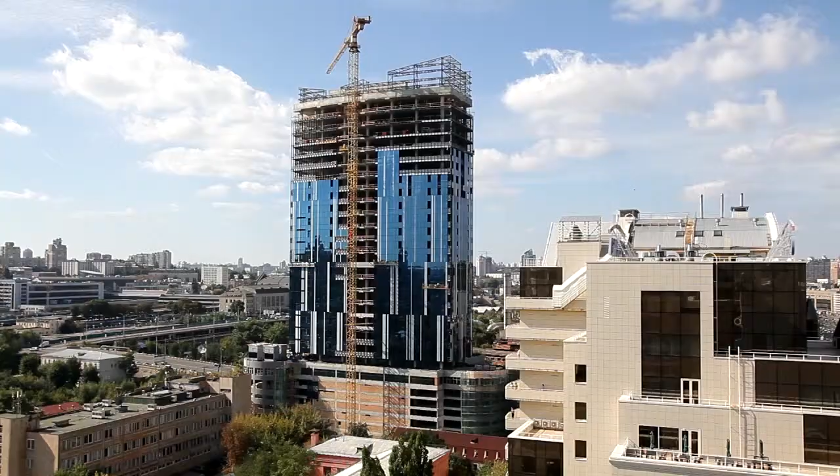Ukraine is a young European country with well-developed industry and steady economic growth. This results in a great number of cars on Ukrainian roads. Battery, one of the most important automobile parts, is the energy source for all automotive electronics. Without a battery, the onboard computer wouldn't work, the radio wouldn't turn on, the lights wouldn't flash. The engine wouldn't come to life without a battery.

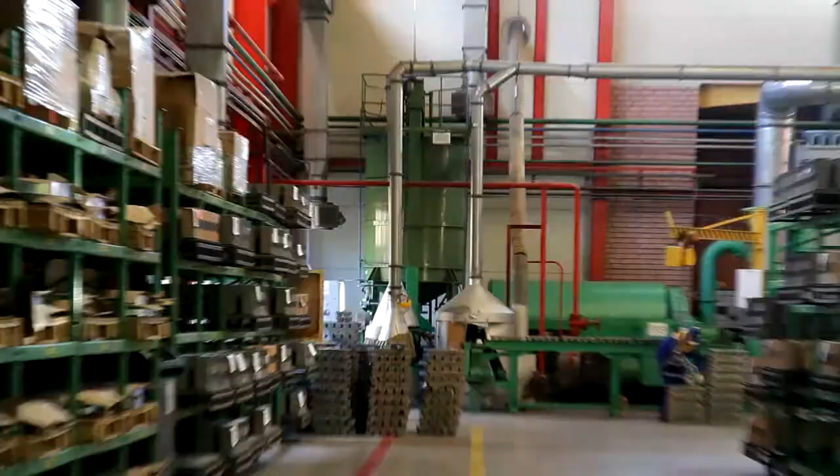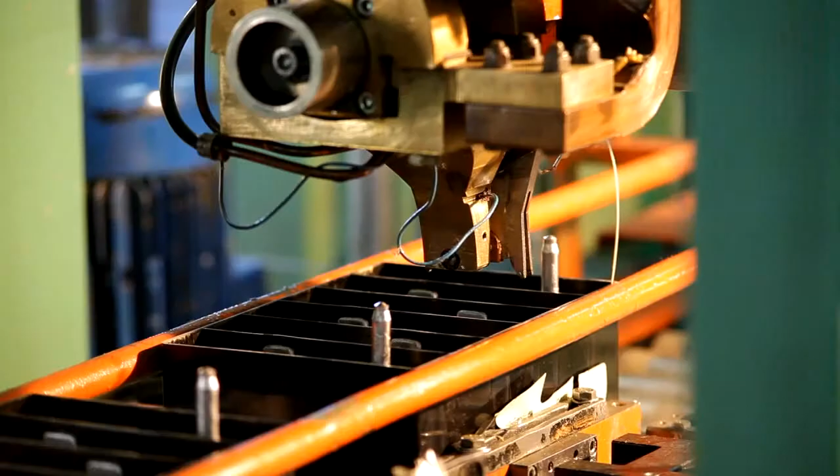National Accumulator Corporation ISTA is one of the top manufacturers of starter batteries in Europe. It was the first Ukrainian company which implemented a full batteries production cycle. High quality of production and the employees' professionalism led the company to gain popularity in both primary and secondary battery markets.

National Accumulator Corporation ISTA.

The history of the corporation began in 1992, when the Ukrainian government decided to create an open joint stock company, ISTA, and to build the first lead-acid batteries factory in Ukraine.

In 1995, the first stage of the ISTA Center factory was launched. In 1999, the marketing and sales company Trade House ISTA was created.

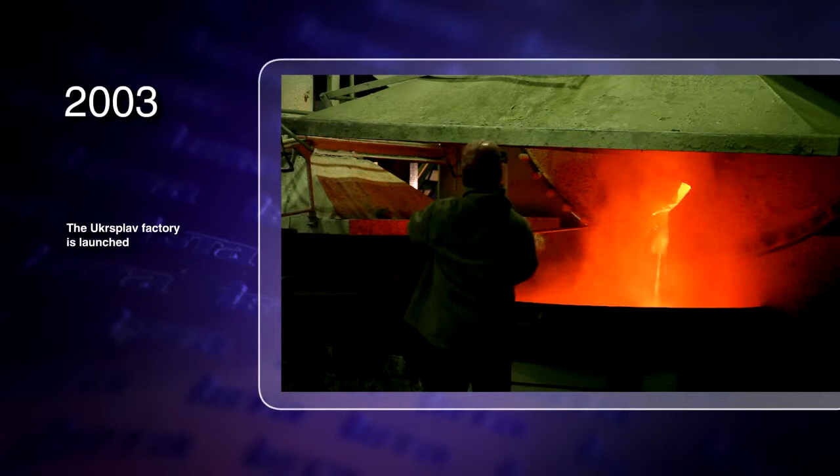The production capacity is also expanding. The second batteries factory, DOS Energo Automatika, was launched in 2001, and in 2003, Ukrsplav, a factory for regeneration of lead-containing materials. In 2006, Interplast was launched, a factory that specializes in polypropylene cases production.

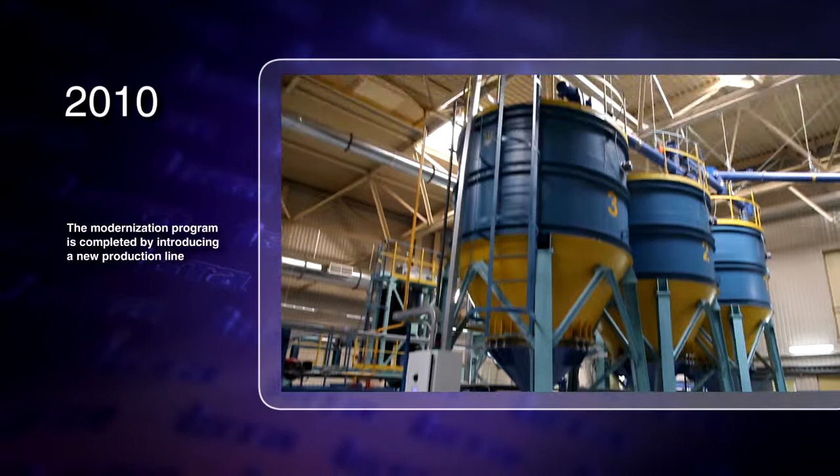In 2007, the corporation began to supply batteries to Renault Group, one of the top automobile manufacturers. In 2008, the international certificate ISO/TS 16949:2002 was attained. In 2010, the modernization program was completed by introducing a new production line.

Battery supplies for the municipalities of Italy and France were commenced. In 2011, supplies to European agriculture machinery manufacturers began. ISTA Corporation became the only Ukrainian accumulator battery manufacturer to receive international certificates in ecological production and quality management.

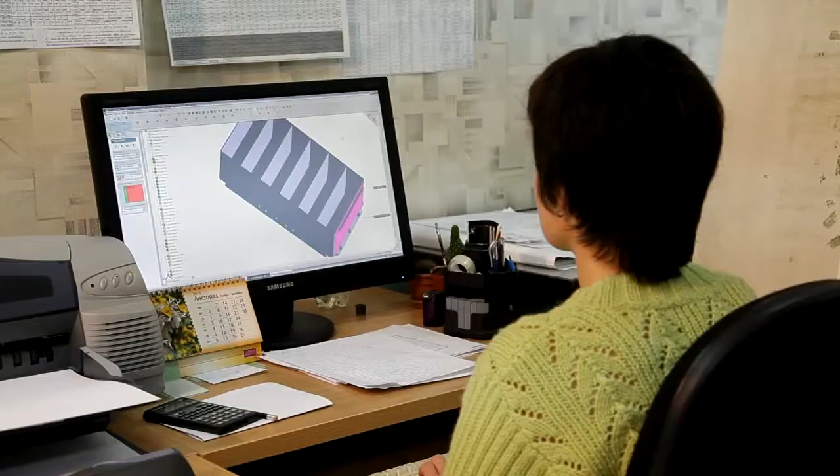Today, ISTA Corporation comprises two factories for car battery production, ISTA Center and DOS Energo Automatika, a plastic parts manufacturer, Interplast, the Ukrsplav factory, and the marketing and sales division, Trade House ISTA. The corporation also has its own research center and R&D bureau.

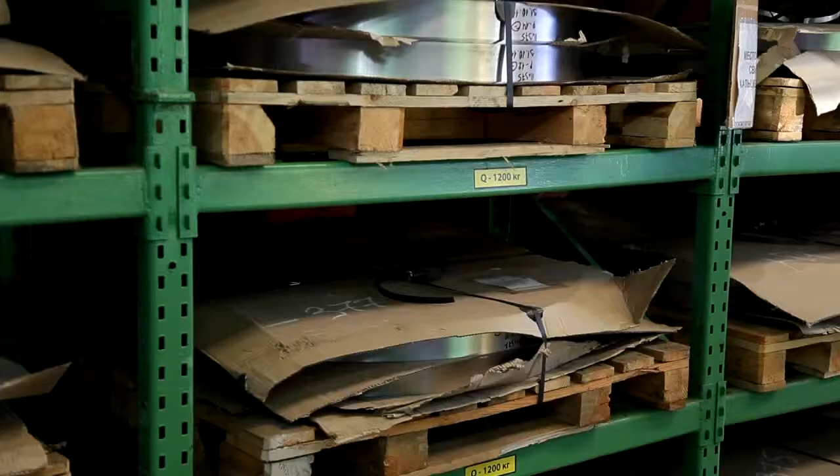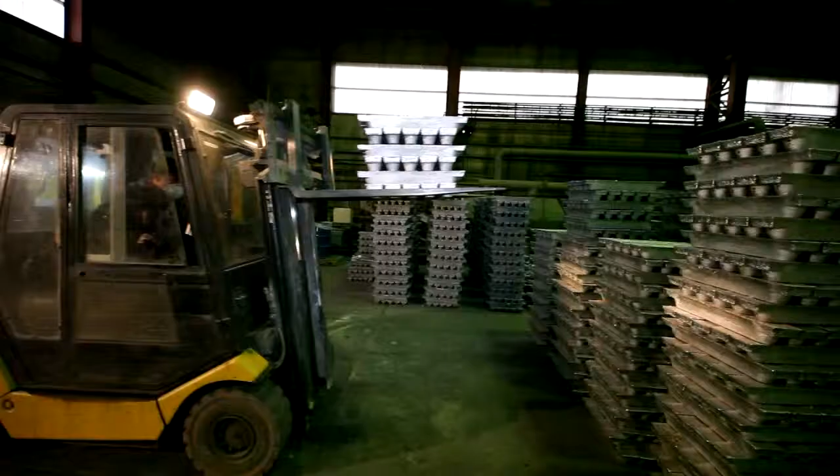This organizational structure ensures a full cycle of battery production, from getting raw materials to delivering finished products. At each stage, strict control of technological processes and quality of products is maintained.

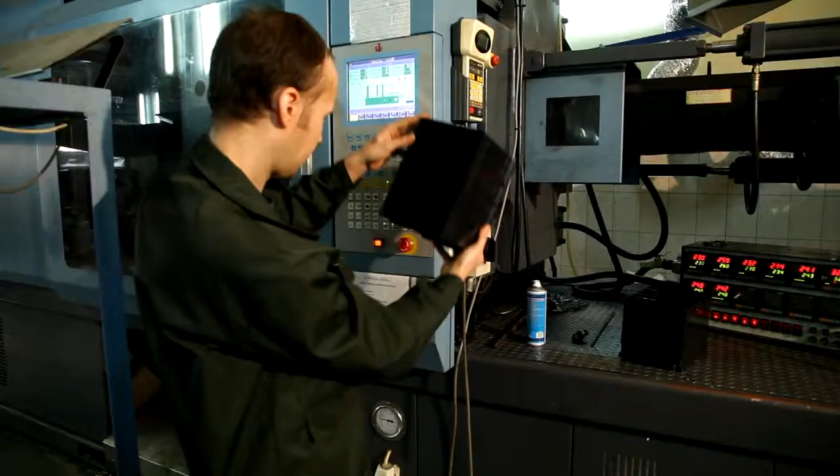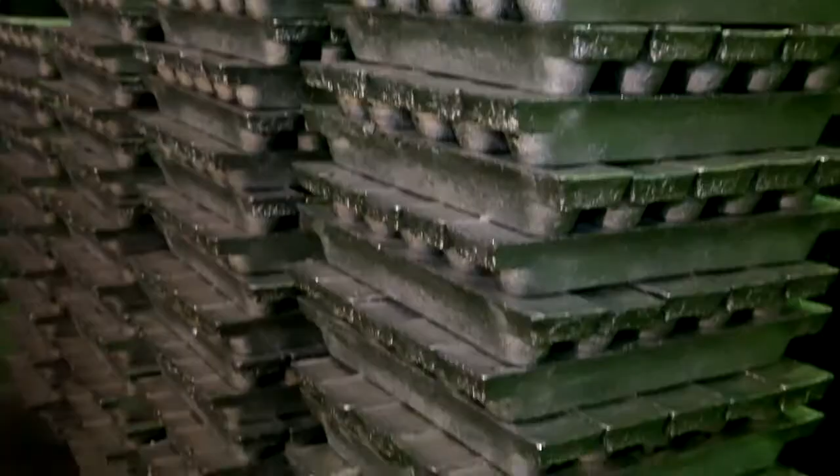The manufacturing process begins at the Ukrsplav factory. Here, leaden alloy is produced, from which the electrode plate, the main component of the battery, is made.

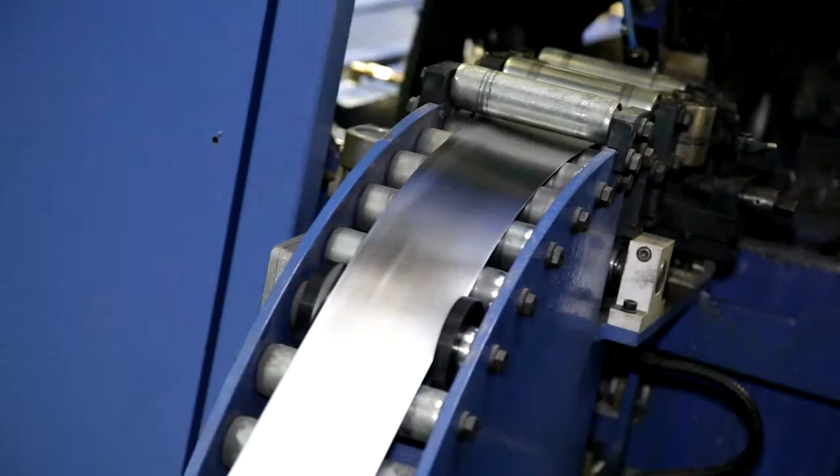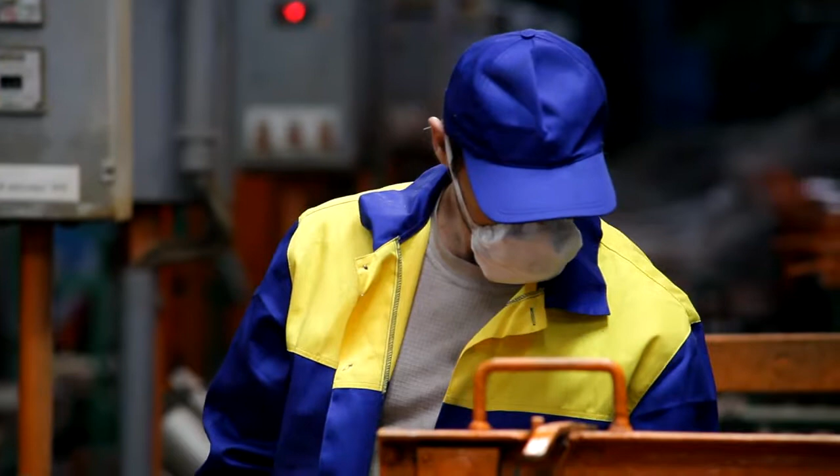The basis of a stretched plate is an electrode grid that is produced at the electrode workshop by rolling tape and its following punching. However, at the foundry, an electrode grid is made by a casting method, which is provided with Wirtz equipment. The cast plate comes without mechanical defects, which prevents the destruction of the battery's insulating layer.

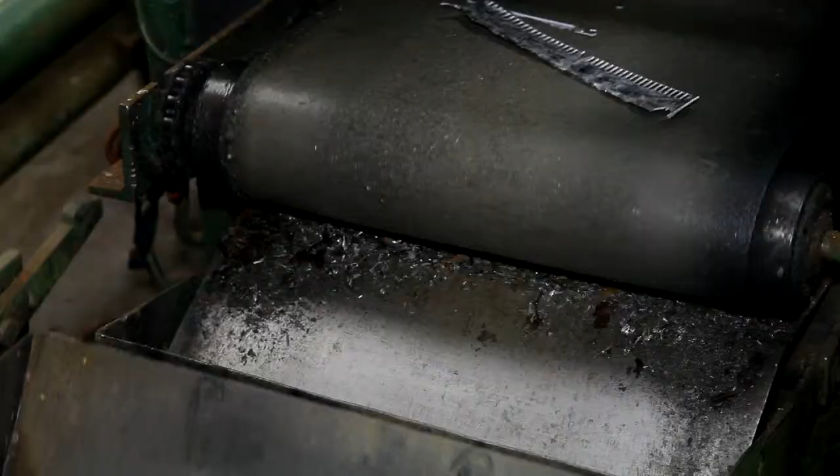Moreover, the casting method is waste-free. All waste materials are returned to the casting boiler.

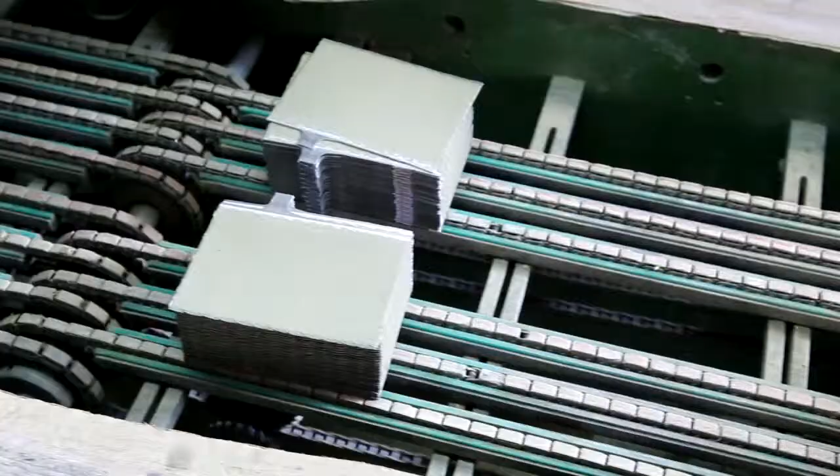Then a specially prepared active mass is applied to the plate. This paste is produced in a modern Eirich vacuum mixer. The vacuuming process ensures more precise temperature conditions and composition specifications.

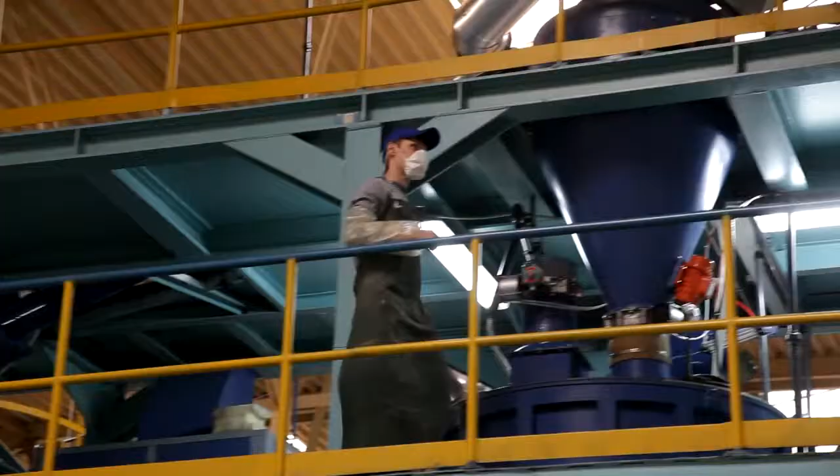A double-side pasting, provided by special automatic equipment, improves the quality of the battery and increases its durability.

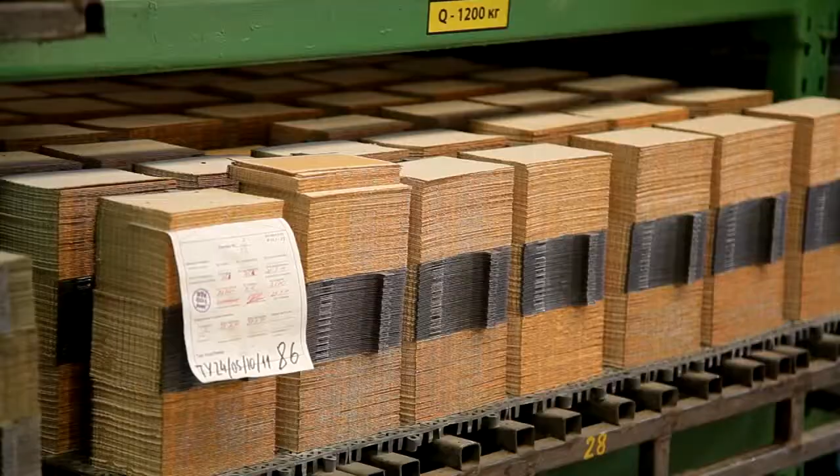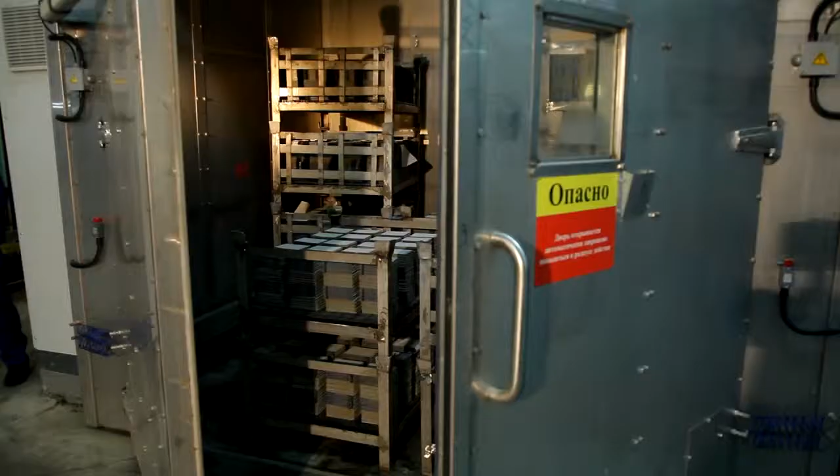Afterwards, the plates are transferred to the curing workshop, equipped with catalytic chambers. These modern curing chambers not only reduce the cycle duration, but also provide precise observance of all required technological standards, which increases the longevity of the battery.

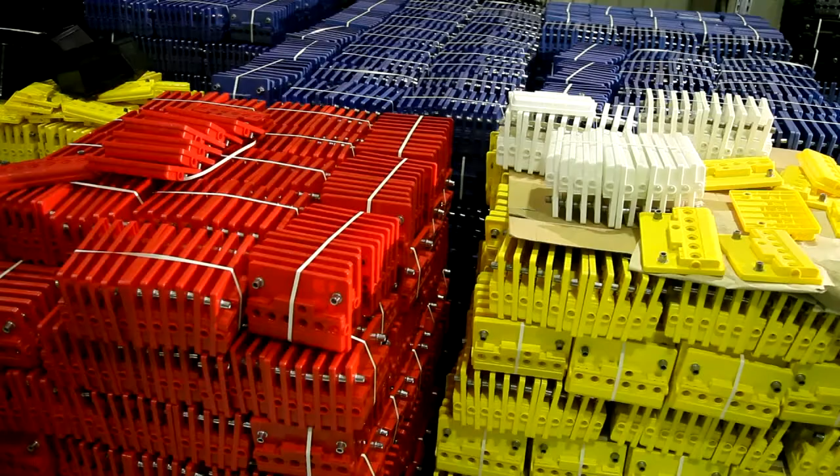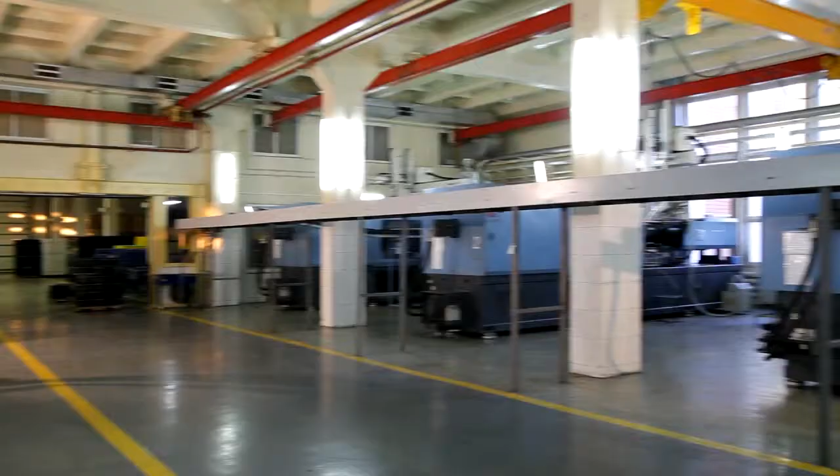In starter battery production, various plastic parts are used. Almost all of them are made at a specialized ISTA Corporation company, the Interplast factory. The factory is equipped with the latest foreign equipment, and most of the production process is fully automated.

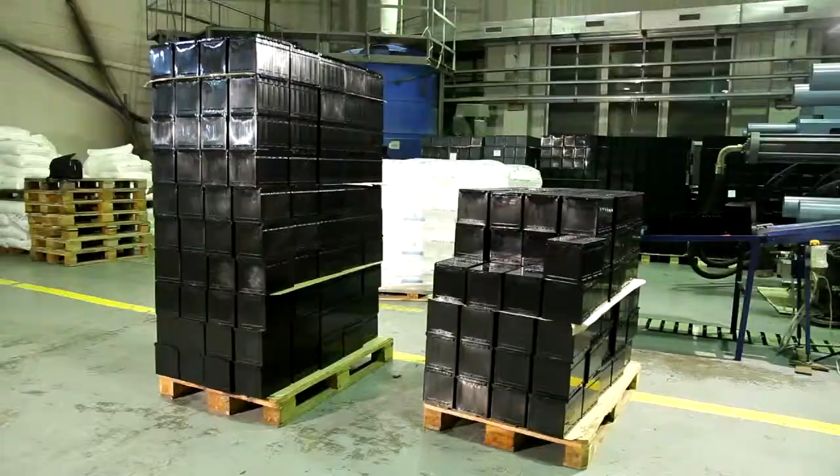A high-quality polypropylene is used as raw material. Use of modern thermoplastic machines allows control not only of the quality of products, but also their appearance.

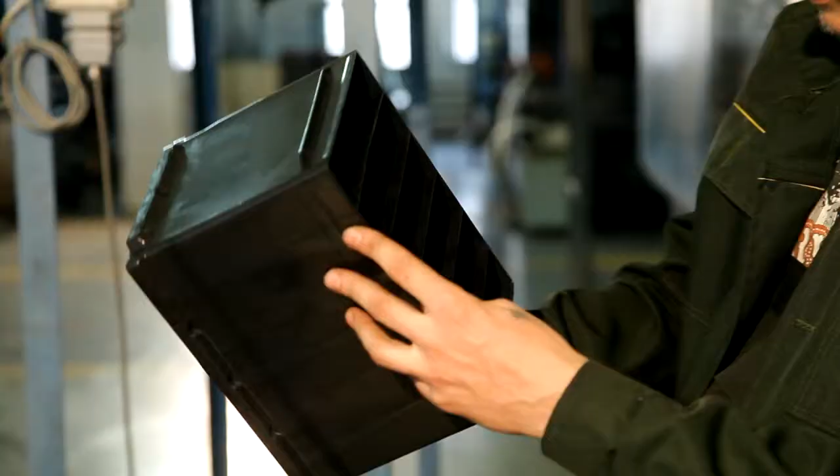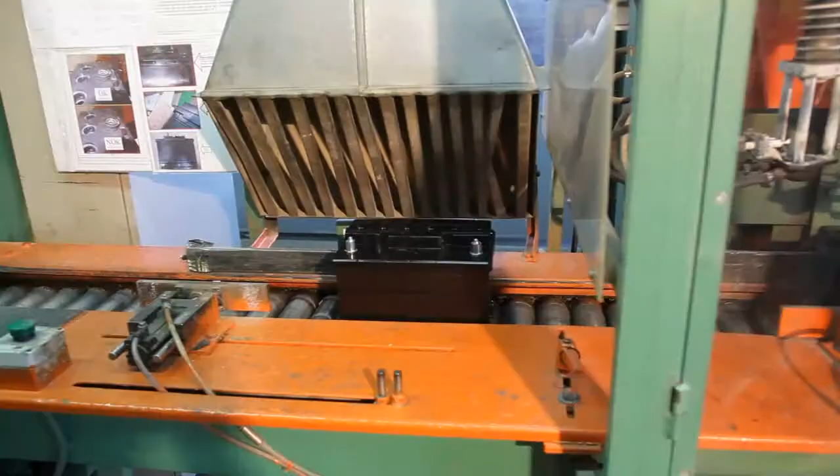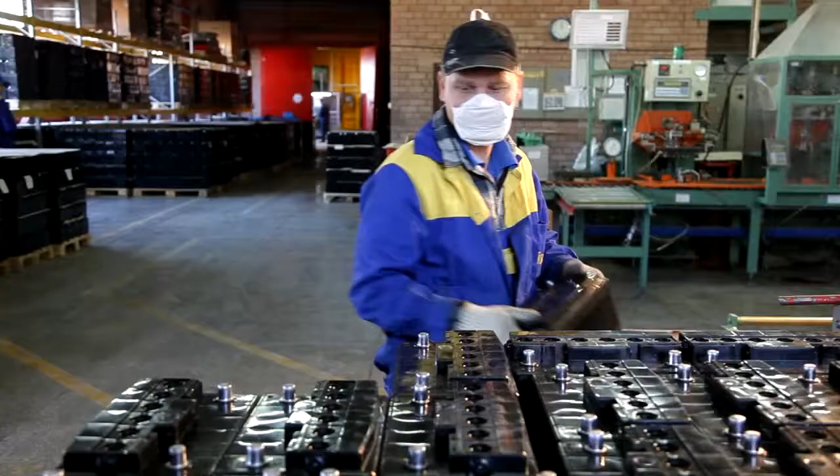The starter batteries are assembled at the assembly shop with Sovema company's equipment. This process is automatic. Automatization allows control of the assembly quality at each stage of the process.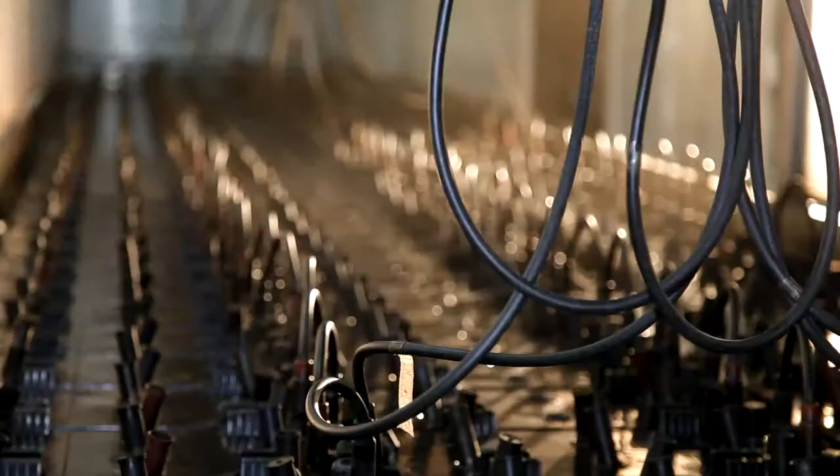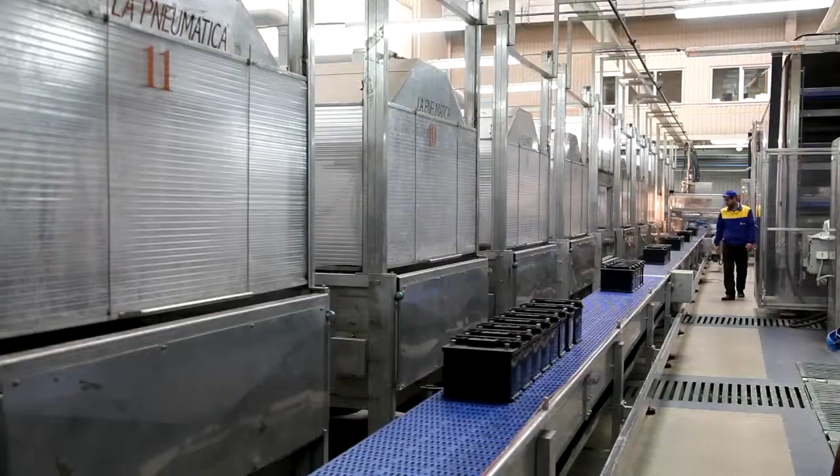Assembled batteries are transferred to the battery forming workshop. The battery forming is carried out on special forming desks with water cooling. Due to the use of modern equipment, it was possible to dramatically reduce the forming time, improve battery quality, and stabilize parameters. This process is controlled by a specialized computer system.

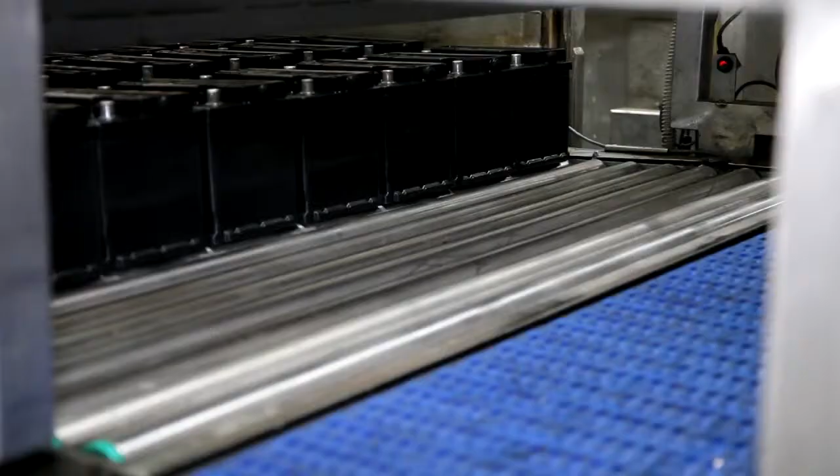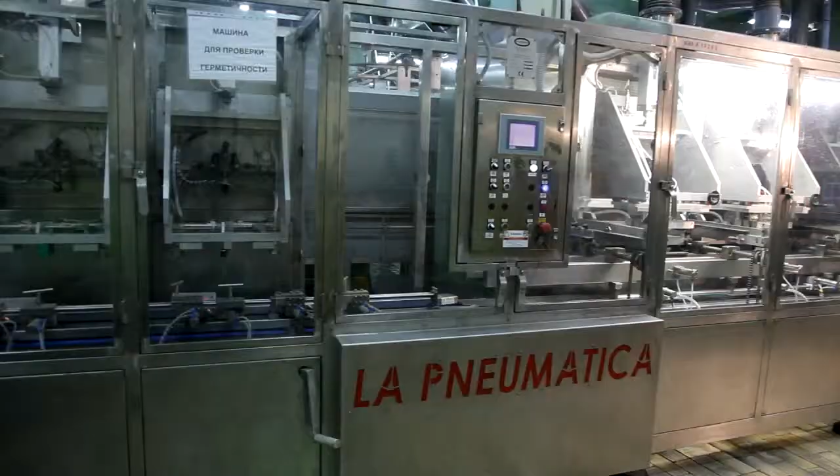After forming, all the batteries arrive to a pre-delivery preparation line, the last point of battery's quality control. This is a fully automated line with La Pneumatica equipment. Even if at the previous stages of production the construction or battery parameters were somehow deviated, it will be identified.

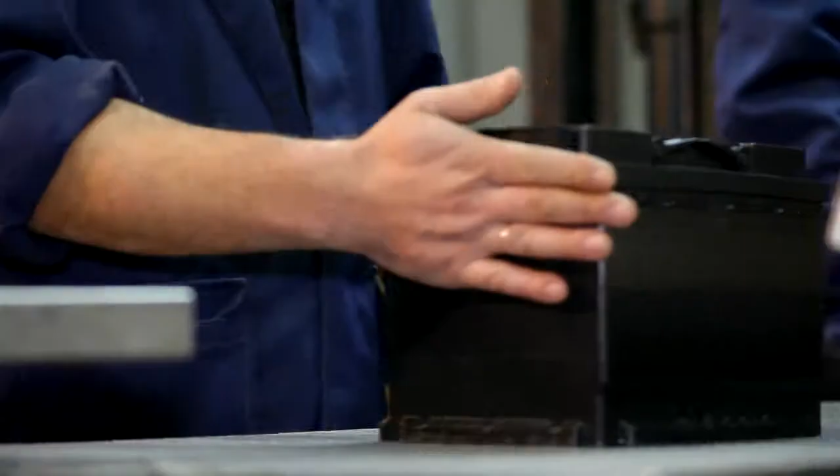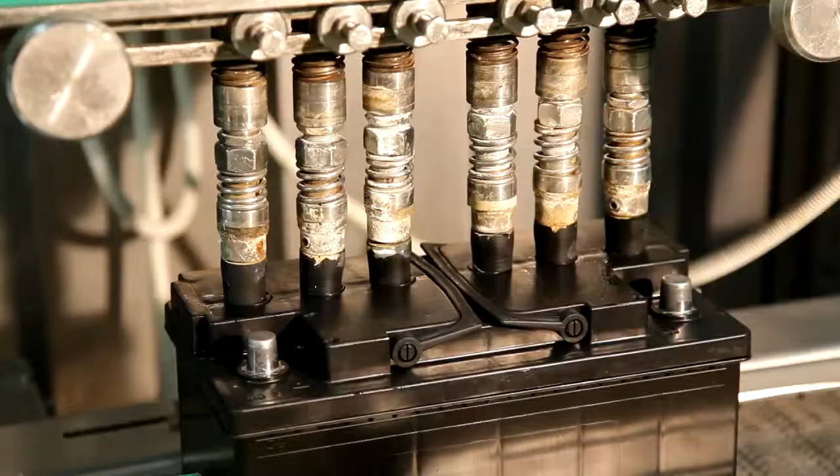Finally, all the products are brought to appropriate marketable condition there. Monitoring and refilling the electrolyte, plug twisting, washing and drying the battery, checking the battery with a high-frequency current and a high voltage are done here.

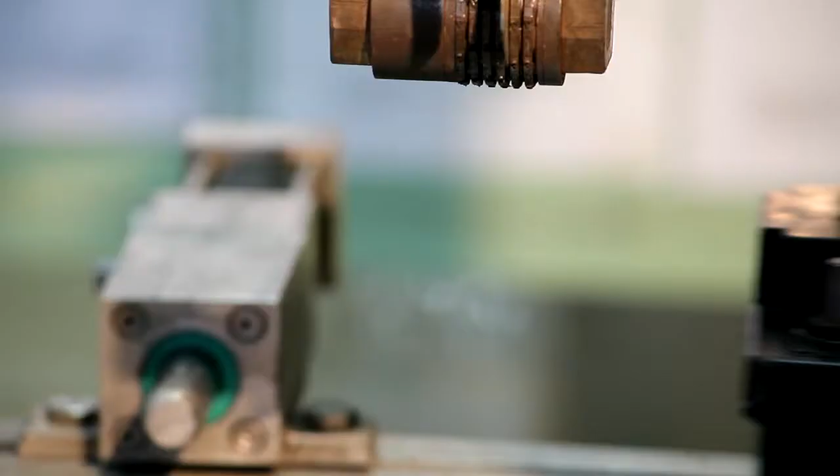After such a strict control, the probability of deviations in the battery tends to zero. At the end of the preparation process, the battery marking and the label sticking are being done. Now, the battery is totally ready to be delivered to the customer.

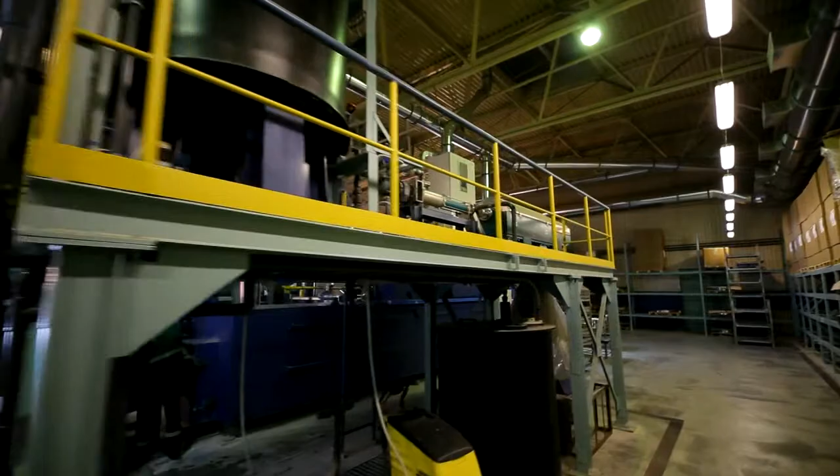ISTA Corporation is a leading manufacturer of starter batteries for cars. Its position as Ukrainian market is stipulated by the high quality of products that meets both Ukrainian and international standards.

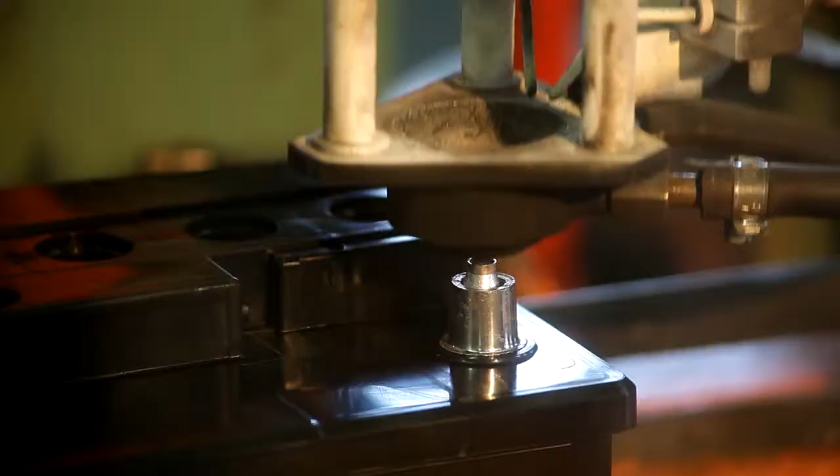Since the quality of the final products is the top company priority, an advanced quality management system certified by the international standard ISO/TS 16949/2009 is implemented.

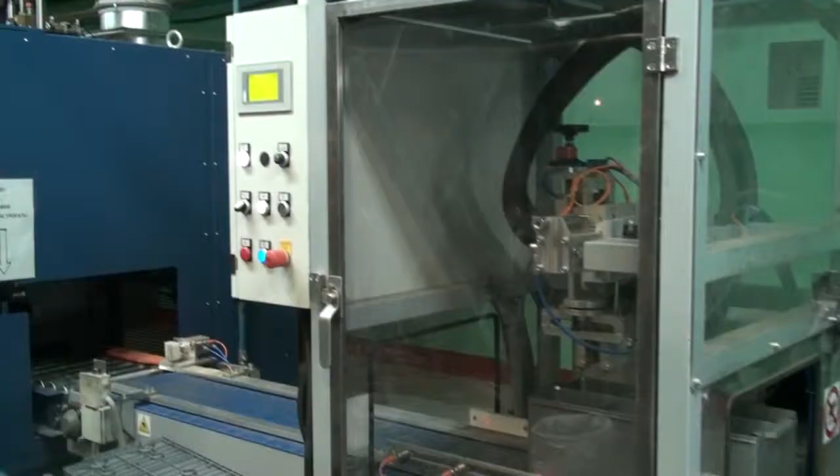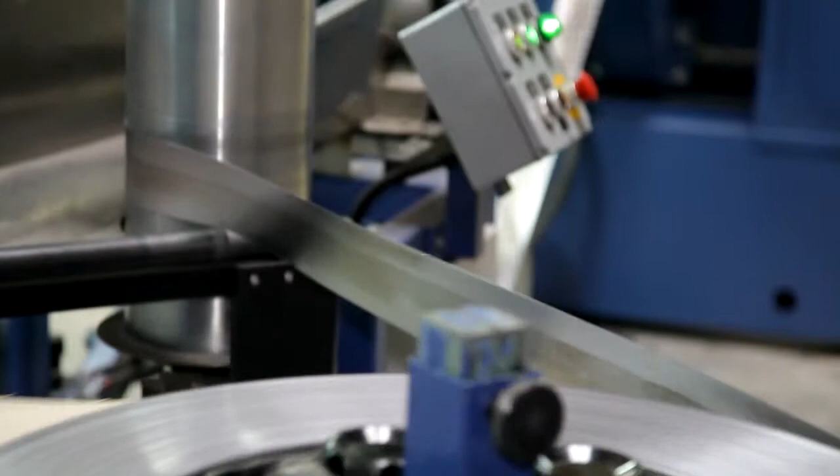According to the requirements, the newest control methods of the main technological parameters of the production process are implemented. To ensure products' constant quality, company plants use the latest foreign equipment. And since most of processes is automated, the probability of deviations from standards and requirements is minimal.

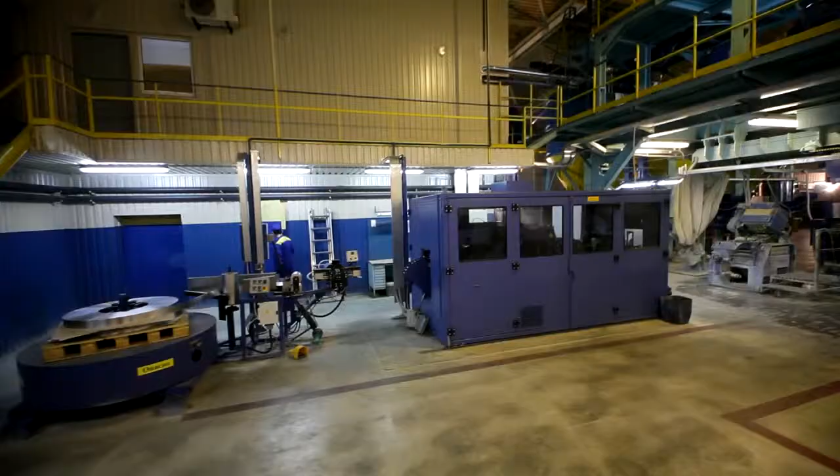In 2011, National Accumulator Corporation ISTA successfully passed the ASES Quality Management System audit for compliance with the Renault-Nissan standards. Successful partnership with this world's leading automobile alliance lasts since 2007.

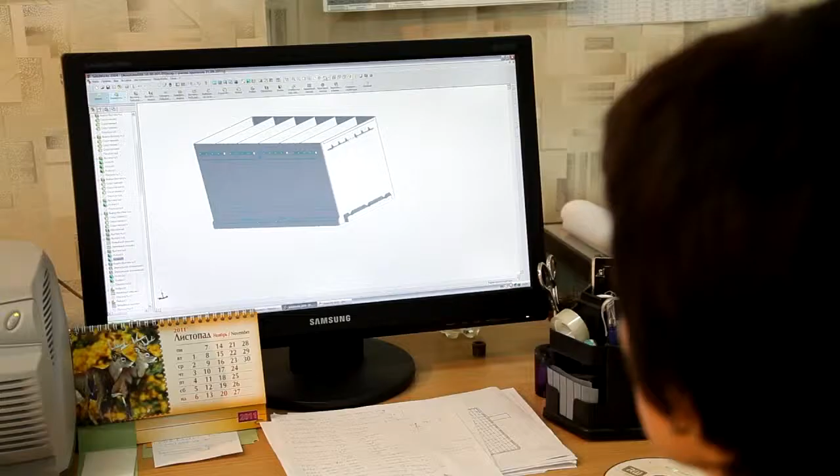A significant contribution to the product's quality improvement is made by their own research and development divisions. The evidence of active and efficient work of these departments is a huge number of patents obtained for different inventions in the batteries production. For instance, here we obtained patents on accumulator batteries for special machinery and maintenance-free batteries.

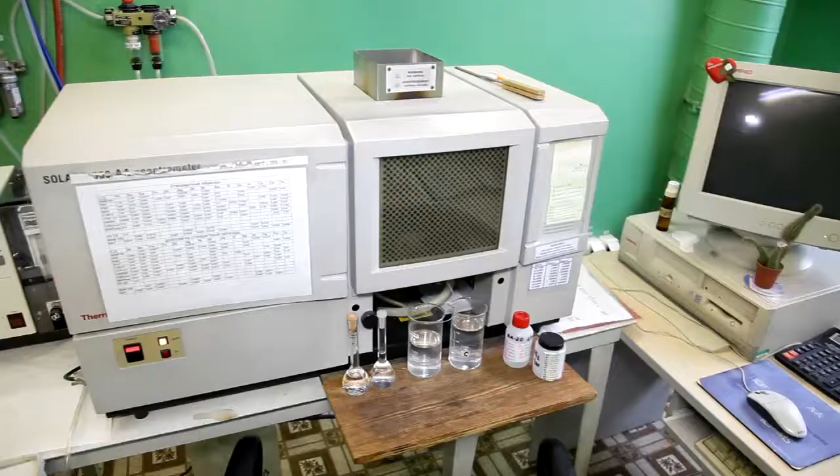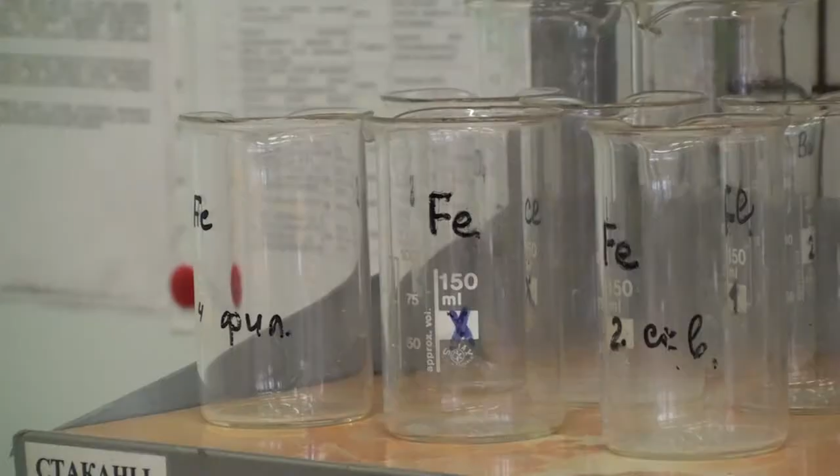The work that is ongoing in the laboratories allows to change the production process according to the specific requirements of automakers. In addition, laboratories conduct research on composition improvement of alloys of lead-containing plates with additional doping, which increases corrosion resistance of the final products, as well as they research the optimization of lead refining modes.

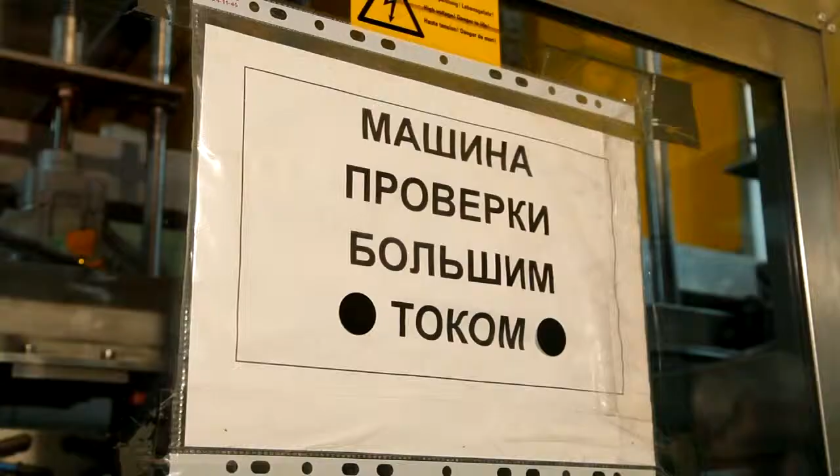The consumer characteristics of ISTA Corporation products comply with the current market requirements. They are a low self-discharge, a resistance to deep discharge, a stable starting power, and improved launch of a cold engine. Not the least of them is a contemporary battery design, which is also crucially important.

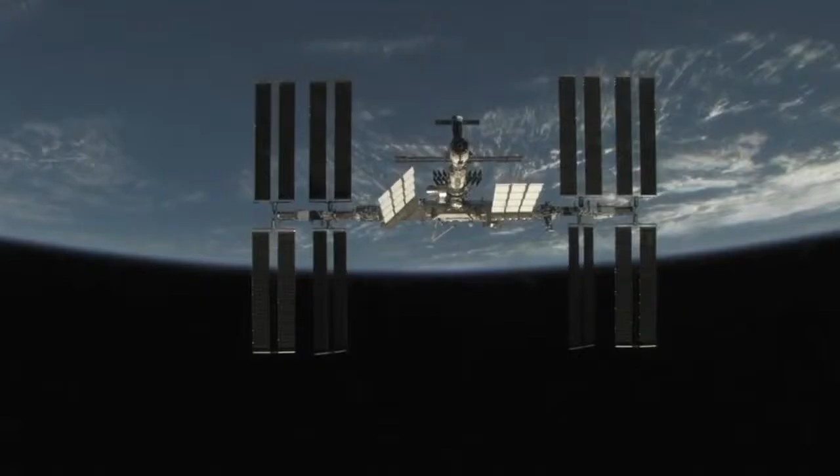Planet Earth is unique. We humans live here. The Earth is our home. However, the more careless exploitation of its natural resources and unrestrained environmental pollution is, the more acute arises the problem of human survival.

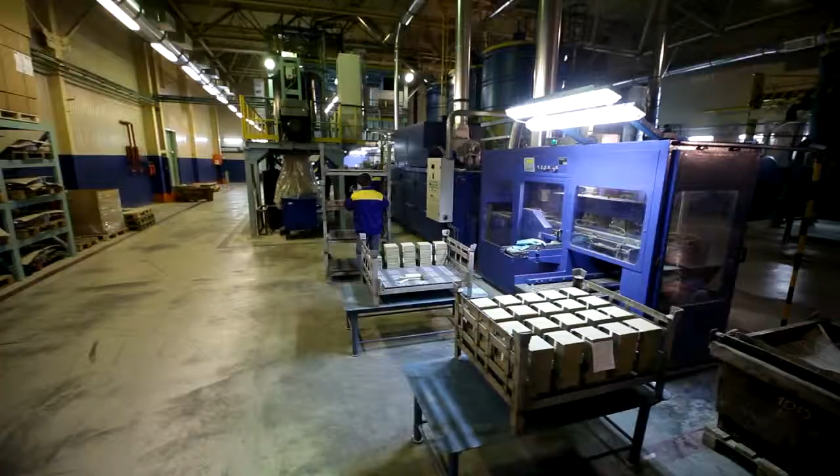Is it possible to leave the planet to our descendants so that it will still have all they need to exist? ISTA Corporation, as a socially responsible company, is very serious about its production ecology. The corporation enterprises follow the strictest environmental requirements, to the raw materials, to all the stages of the production process, to the wastes.

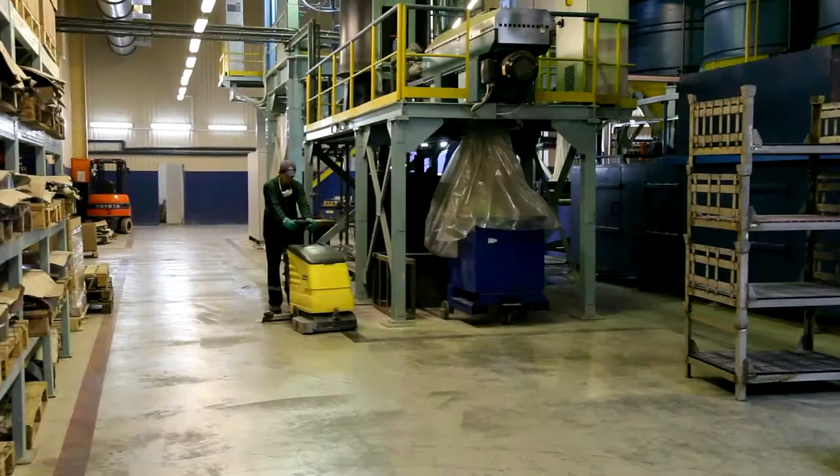That is why ISTA Corporation is the only Ukrainian starter batteries producer which received an international certificate in environmental production, ISO 14001-2004. This certificate foresees strict standards on environmentally safe production and natural resources management. Such attitude to the ecology of the whole production process will save our nature for future generations. After all, ecology is the science that aspires to the future.

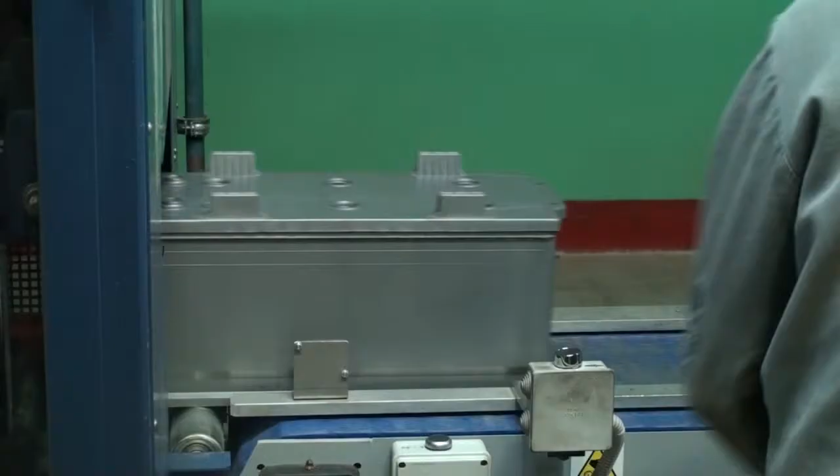Nowadays, the corporation produces all types of starter lead-acid batteries of different sizes and various capacities. Premium maintenance-free accumulators, reliable and durable with prolonged service period.

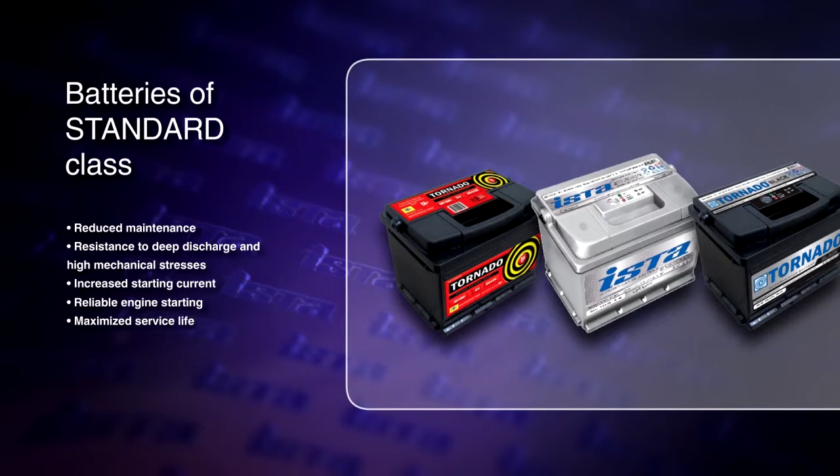Standard class batteries with low maintenance, improved properties and increased starting current. And the economy class batteries with the usual values of nominal capacity and starter discharge strength that combine an ease of service and a good performance.

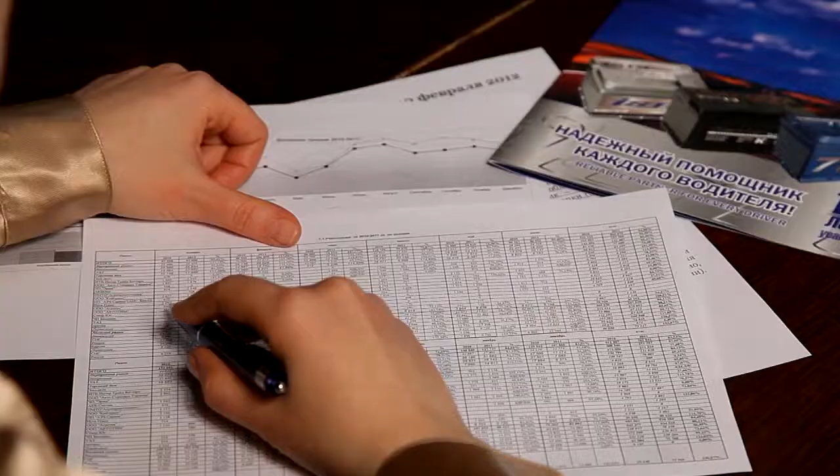Products promotion both at internal and external markets is the main task of Trade House ISTA, which was created in 1999. Proper sales and marketing strategy extended geography of battery sales far beyond Ukraine.

Today, ISTA Corporation accumulators are sold all over the world, in former Soviet republics, in Germany, France, Great Britain, Italy, Finland, Slovakia, Poland, Cyprus, Lebanon, Iraq.

The world's leading automakers are among the partners of the corporation, and one of the company's most important achievements is the conclusion of a long-term partnership agreement with the world-famous automobile concern Renault.

Although National Accumulator Corporation ISTA goes on to develop, it improves technologies and upgrades production facilities, increases the production volume and expands the geography of sales and partnership. Though the most important is still the quality of products that is going to improve constantly. After all, it's the only way to remain a leader in the automobile batteries manufacturing.